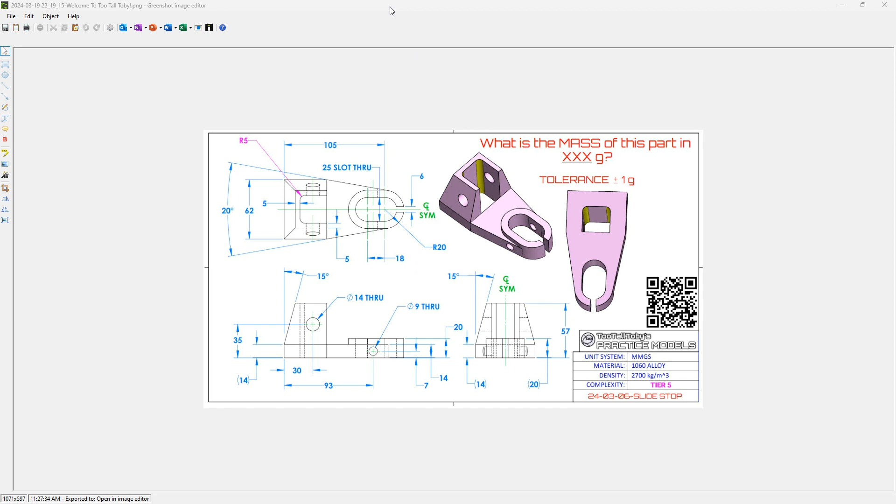So our drag and drop, some sketch creation, and show you how it's done in IronCAD a little bit differently. We'll go ahead and move this over to another screen. The first thing we're going to do is start with the slot feature in our standard starter catalog, and we'll go ahead and select that feature.

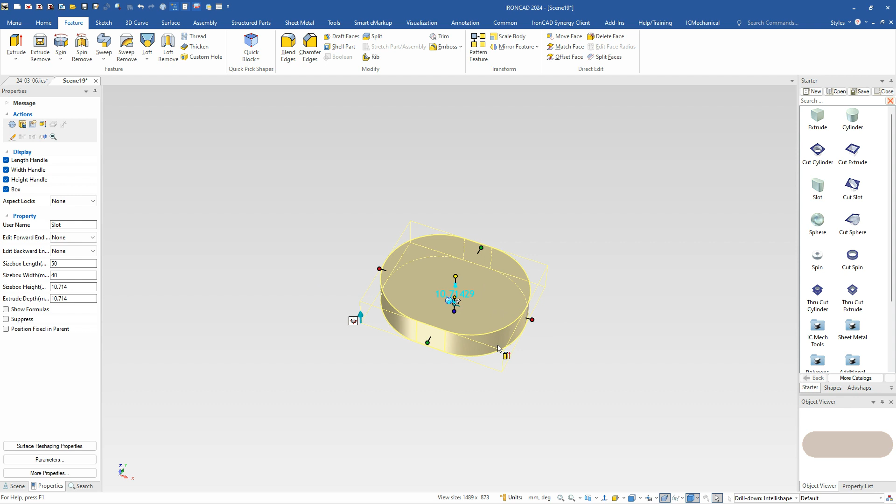We know the width is 40 for the major diameter there, and we know the center to center is 18, but our handles, if you can see on our link, are on the outside. So we'll select on these and set a value that we know it's 18 from center to center plus our width, which is the 40. So we'll put plus 40 inside there, and that will give us our base for our slot.

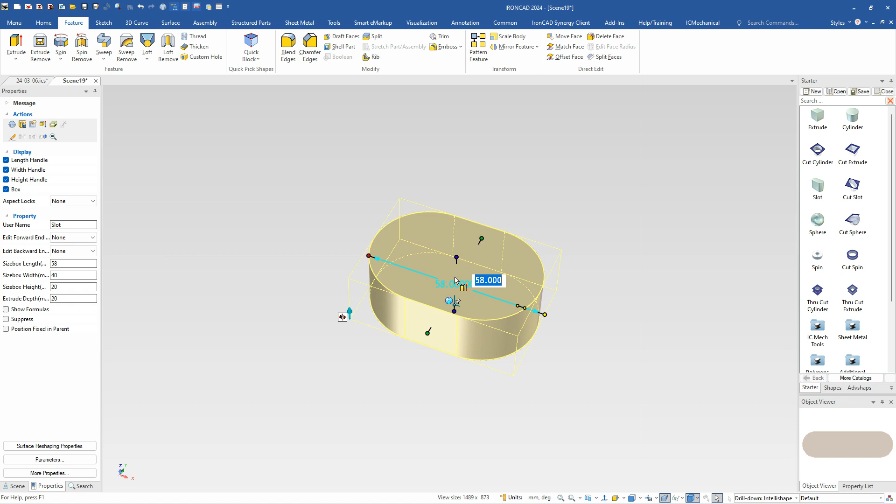We also have a height value, so we'll go ahead and set that height to 20. We'll set that as our starting point. Next, we'll go ahead and do this angle shape here.

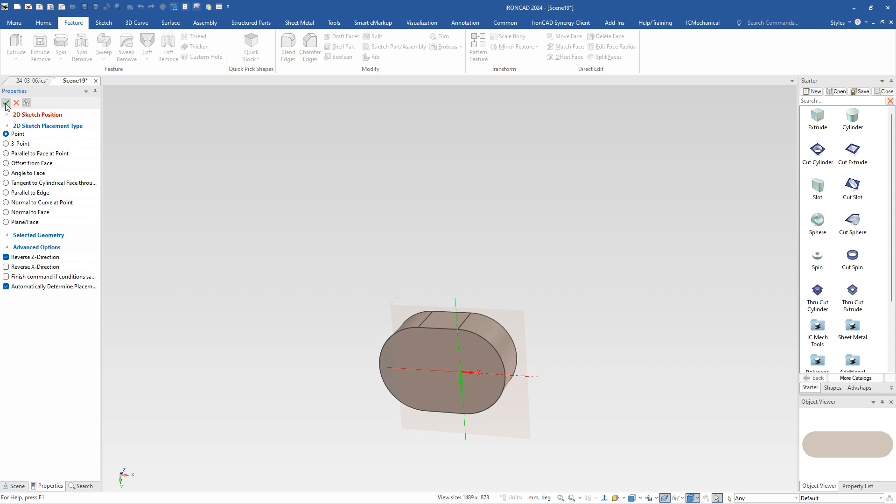What I'm going to do is rotate over here to the bottom, select our part, and go ahead and do an extrude shape off of that. What we're going to do is put a 2D profile right on the center point of our arc, because that's a reference for our 105 dimension that we need to use. This is showing our direction for our sketch with that little arrow, so that's fine. We're going to extrude that direction.

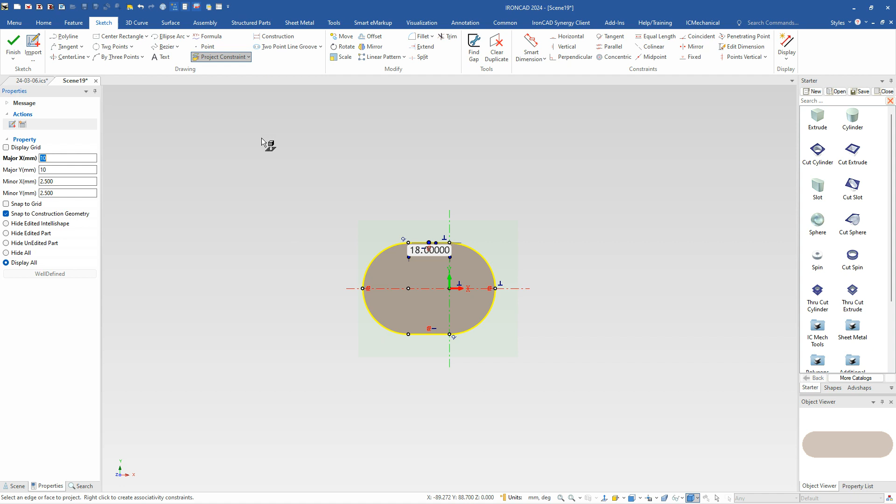I have it set to hide all. You can display it so you can see this geometry, or you can hide it - that's just the display settings you can use. But I do need to see it for a second because I do want to use this existing geometry, so I'm going to project that geometry as a construction element so I can see it's there. I can turn that off, and if I hide everything, you can see I now have those as a blue dashed line denoting construction geometry.

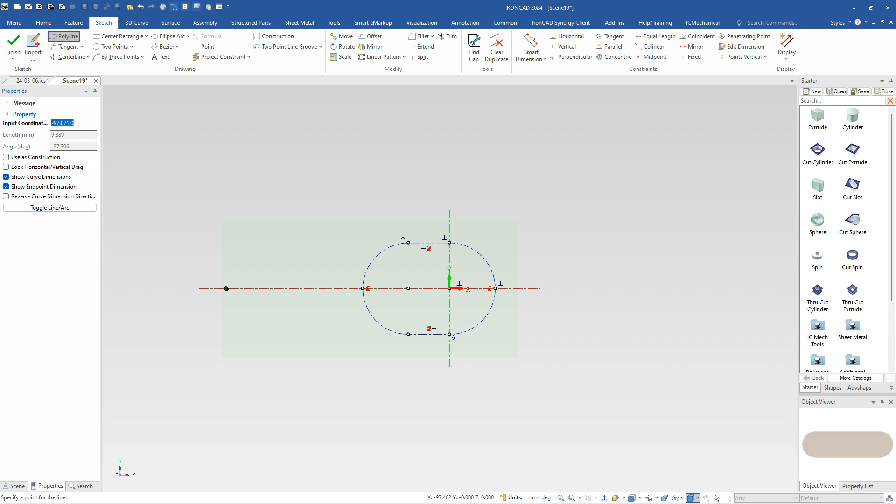Next, we want to go ahead and do a polyline, and this is going to be real geometry, using the S key. I access the polyline there, and I'm going to do a reference from my origin x-axis, go up vertical a certain value - it doesn't really matter what that is right now - and drag it over until I can see that tangency, that little blue item on our curve, then go straight down to the bottom and hit this line again.

You've seen some dimensions up there, and I'll go ahead and turn those off and explain them individually, since they come in handy here. Some things we want to do: make sure this remains vertical, and make a coincident of this point to this arc. One reason we want to do that is when you change this, this curve can move fully.

And in doing so, if you don't have that coincident, the curve can move, and then you have to extend it back or trim it later. So what we're going to do is make sure it's coincident with that, so when this line changes, we'll get that information.

The next step, you can do this in multiple ways. I'm going to show you an alternative way to build this versus traditionally using sketch dimensions, where you can put an angle sketch dimension here and a dimension from here to here and drive this curve, which you can easily do with our smart dimensions in IronCAD. But you don't always have to add dimensions in your sketches - it's not always a requirement that you'll find in other CAD systems.

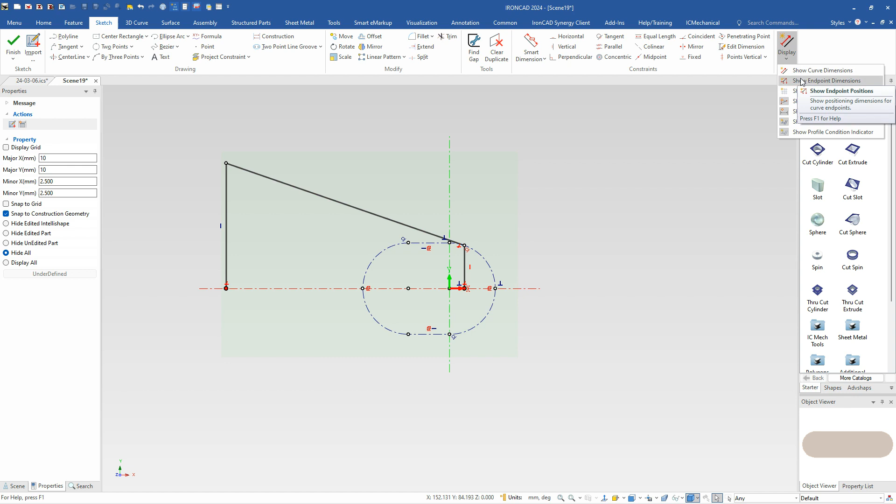So what I mean is those things I had on before were what we call curve dimensions and endpoint dimensions. Curve dimensions are exactly that - if I select on a curve, it's going to give me the length of that information and also the angle. In this case, we know this angle has to be at 10 degrees or 170 here because it's going to total 20 on each side. So we're going to change that by double clicking and typing 170.

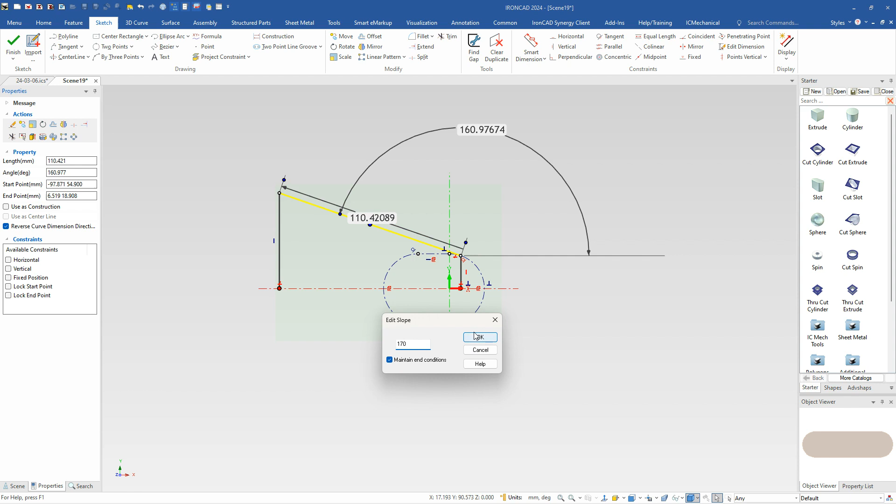Now there's an interesting option here that says maintain end conditions. What that means is it's got to maintain this tangency and this height if that's on - so it actually wouldn't allow this, because this height has to change. So we're going to turn that off and say go ahead and make that change. It's going to move that height, change our value to 170, and maintain this because we have constraints on there.

So that gives us our first part - that's what curve dimensions do. But again, the curve dimension is this length here, which is not what I know. All I know is from this center point or this y-axis to here is a certain distance, so this won't do me any good. That's what the other option is - endpoint dimensions.

Endpoint dimensions, when you select on curves, can show you the endpoints from their references on either end of the curve - in this case the x and y - but you can also move these to other references, which is really handy if you have other geometry you want to refer to.

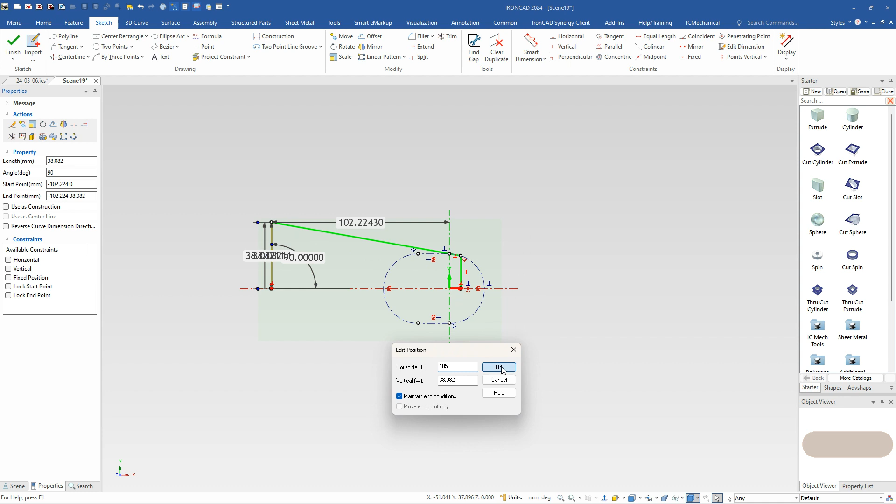In this case, we know this line is 102 right now, but we want that to be 105, so we're going to set that to 105. But here we do want to maintain the ending condition - we want to maintain this and this slope. So when we hit 105 and hit OK, we can see we've got our distance 105. We select on this, we still have our 170 inside there - without adding any constraints out here, we can do that easily within IronCAD's curve dimensions and sketch position dimensions.

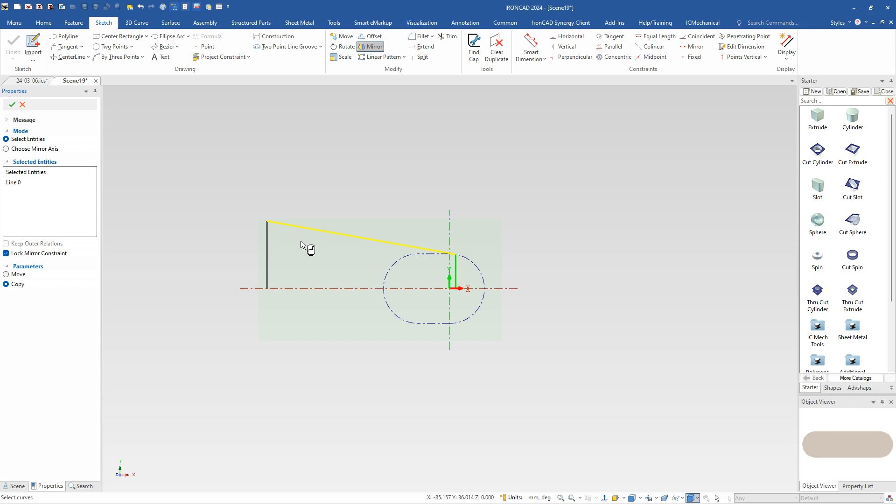Next, we'll go ahead and mirror this over to the other side. We can do this as a constraint or just a mirror command - we're going to select that curve and mirror it over to the other side and place that. Then we can extend these other two down, accessed through the S key extend or on the ribbon bar. You can see it highlighted, but also see what it's extending to - you can hit tab to extend to another curve down, and we can extend to those two lines down to connect there.

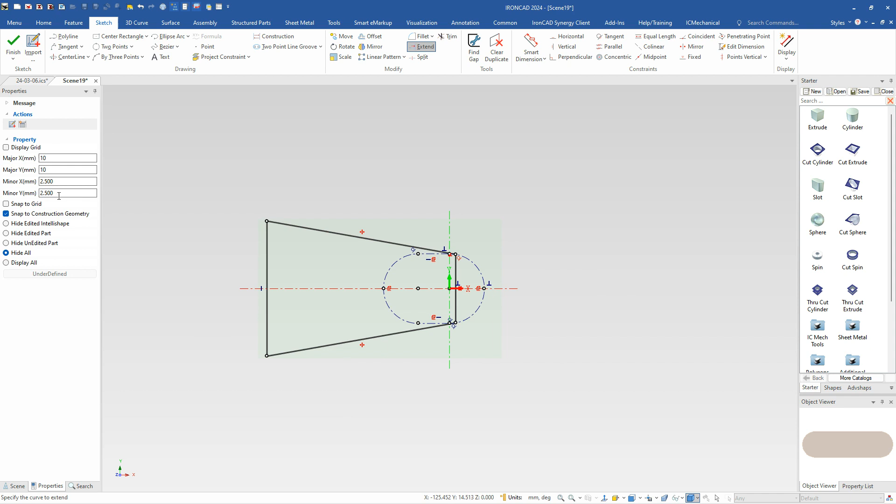So that basically builds our profile very easily in IronCAD - again, just a different way. We could have done it with sketch dimensions if we wanted to, but we didn't need to. We can also extrude our sketch, and we just set a value of 14 for the height and hit OK to go ahead and build that. So that's kind of how I built that angle here.

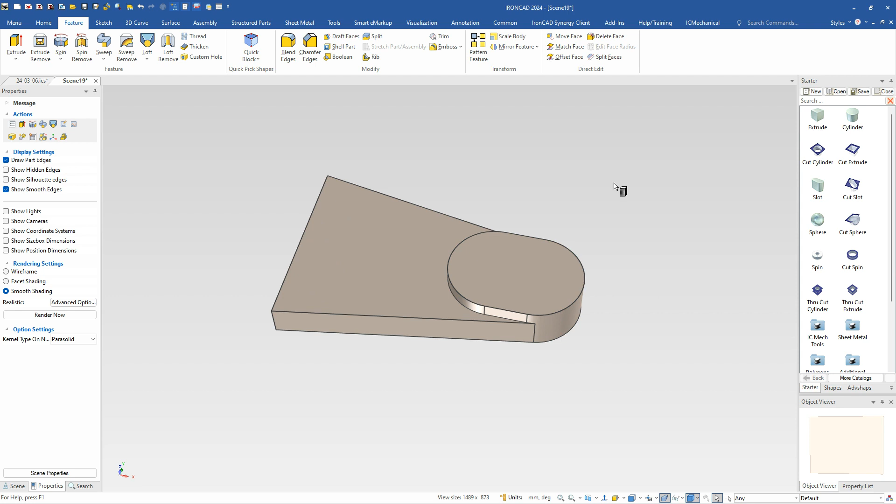And the next thing is our little extrusion here off the top. This one's interesting too because there's a couple unique things - we don't know how deep this thing needs to go. So what I'm going to do is drop my extrusion on here and align it to the back. We know our width of this thing is 62, I believe - let me double check that.

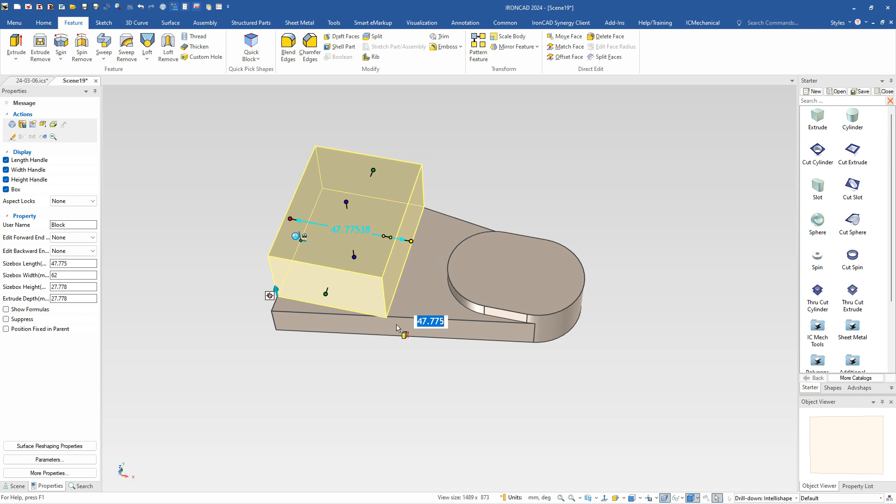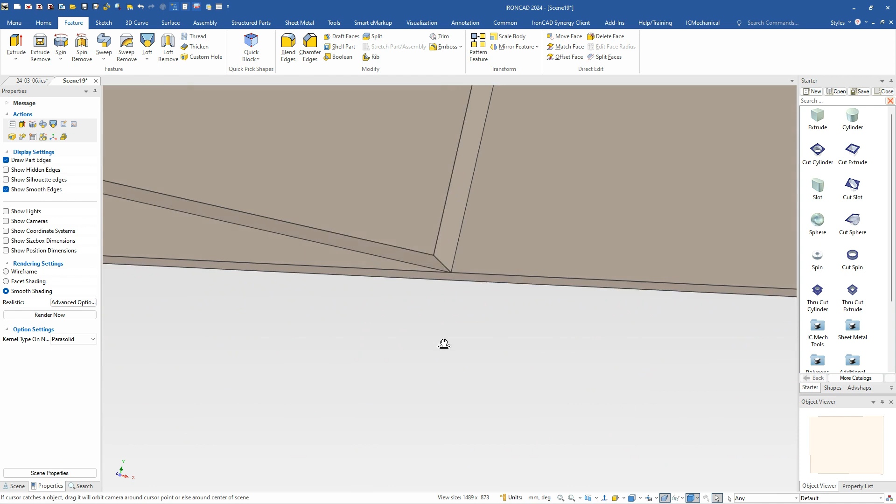62 millimeters there, so we're going to set that value and pull this one in. Notice I don't have an actual point to snap to, so I can't get the intersection point because there isn't one at this time. So even in this case, if I try to snap back here, I can actually get the actual intersection point. That's one way to approach it - just pull it past it so you get an intersection point and snap it back.

It's sort of like if you would have started in a sketch here, extruded the sketch up, and drew a line until it penetrated that curve, or coincident with that curve. Either way, this is just a way to do it with our handles - a fast way to pull it past and pull it back to get to that snap point.

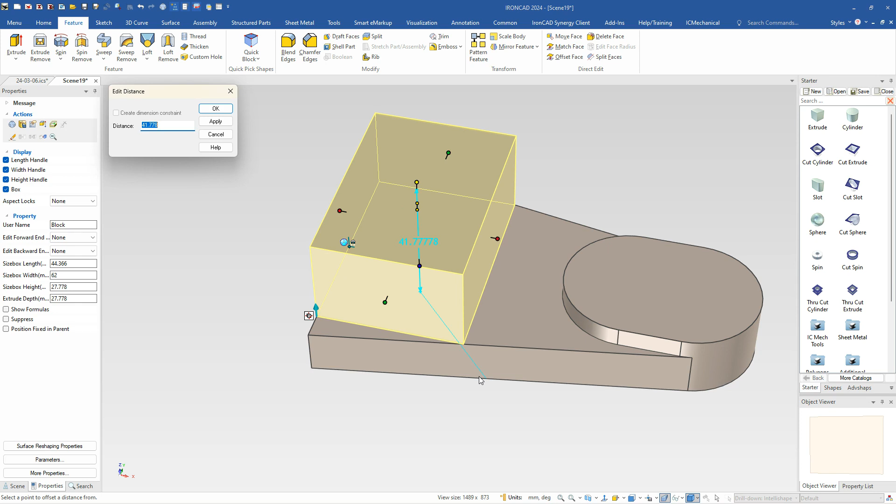The other thing we know is this has an actual height, so we're going to edit the distance from a point from this bottom edge here. We know the height of this thing is 57 from the bottom to the very top, so we can set that. That gives us our basis for this extrusion.

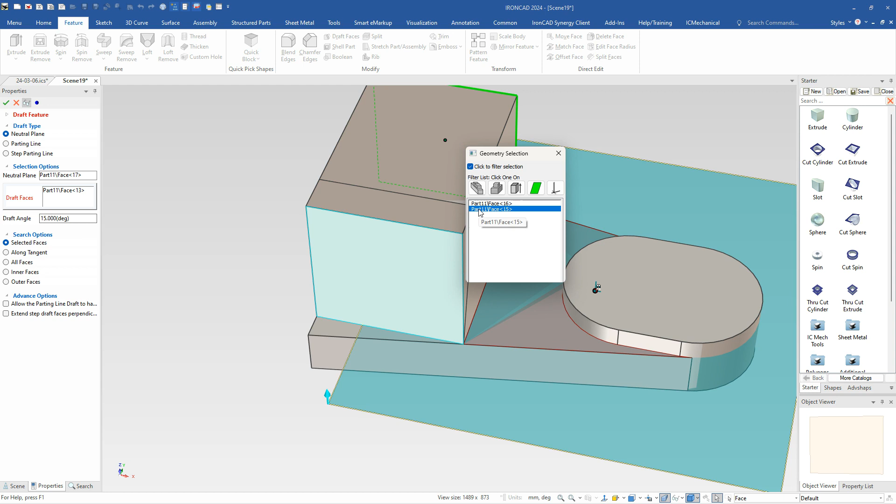Next we'll use our draft faces, which will allow us to draft this face 15 degrees, and we want to do the other side. We can rotate around or do Control Alt left click, which brings up our geometry selector. We want to get this back face as the other face to add to that list, so we select those two and hit draft on them. Now we've got our draft for those two faces.

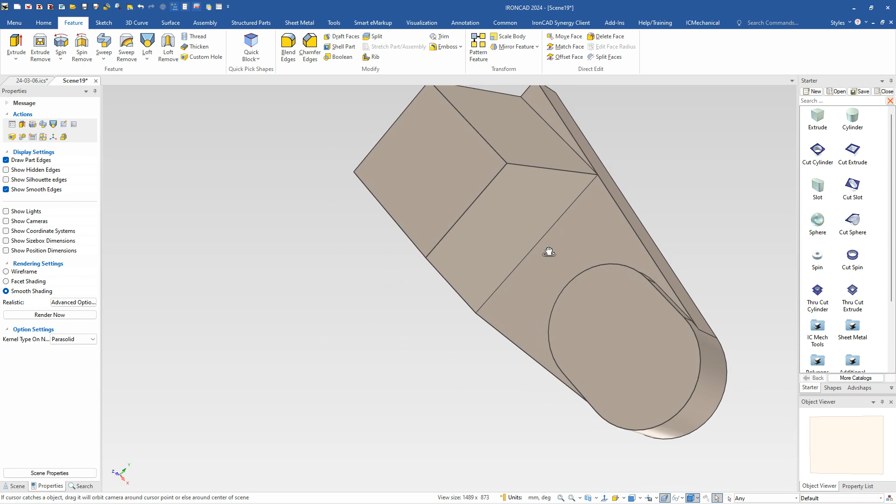Now we know we have these little overhangs here, and we don't want these. We don't have to create a sketch - we just grab that face, get a handle, and pull it down to cut that extrusion off. We can do that on both sides. Grab the other one, pull it down to the other side - I don't really care how far, I'm just extruding it down.

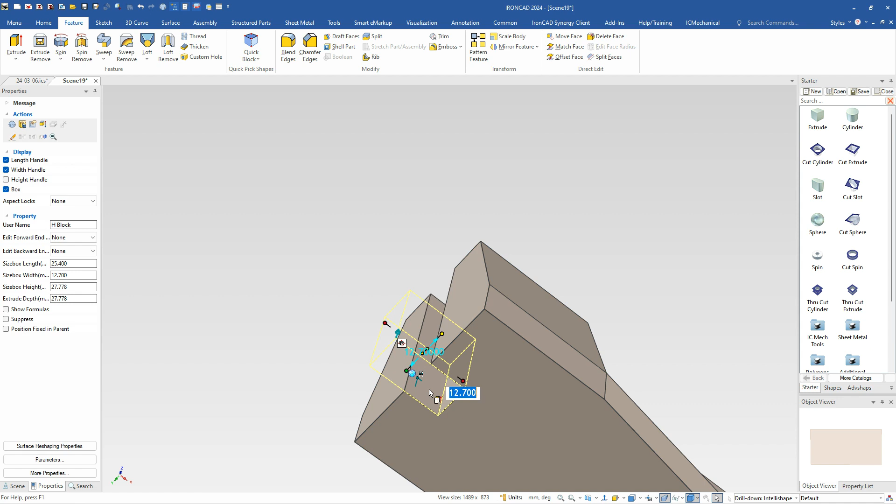That gives us our basis for the shape, and now we have to deal with this taper on the back. This one's actually fairly easy to do as well. I'm going to rotate to the bottom, and drop a through cut on this center point, simply aligning it to this back face. What I'm going to do is just rotate this thing.

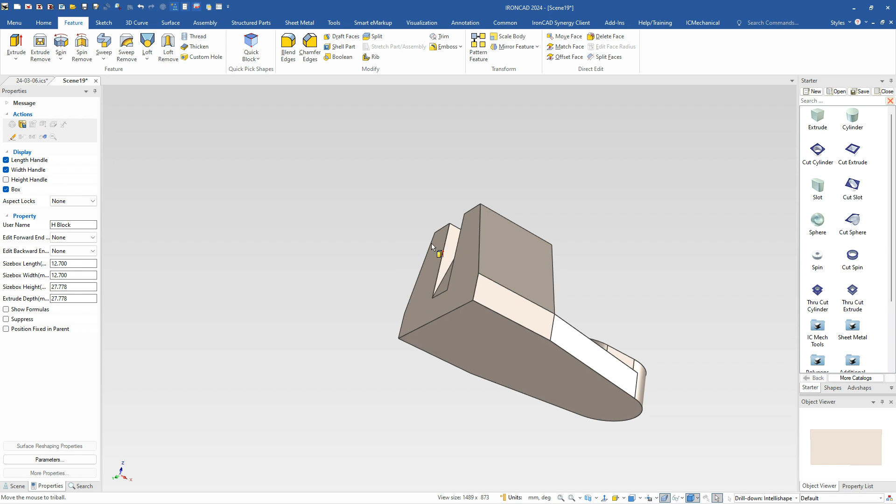How I'm going to rotate that is using the tri-ball. I'll pull the tri-ball up and snap it basically over to this location - that's where we're rotating about, essentially. Then I'm going to rotate it over 15 degrees, and that will give me my shape for us to pull our handle symmetrically to cut that extra geometry off. So that's a simple way to approach that.

We don't have to do any extra draft planes or put an edge there, like for a parting edge or anything like that. To draft, we can just use an extra shape and move it around. This is kind of just the way we work in IronCAD - we just think in 3D for this.

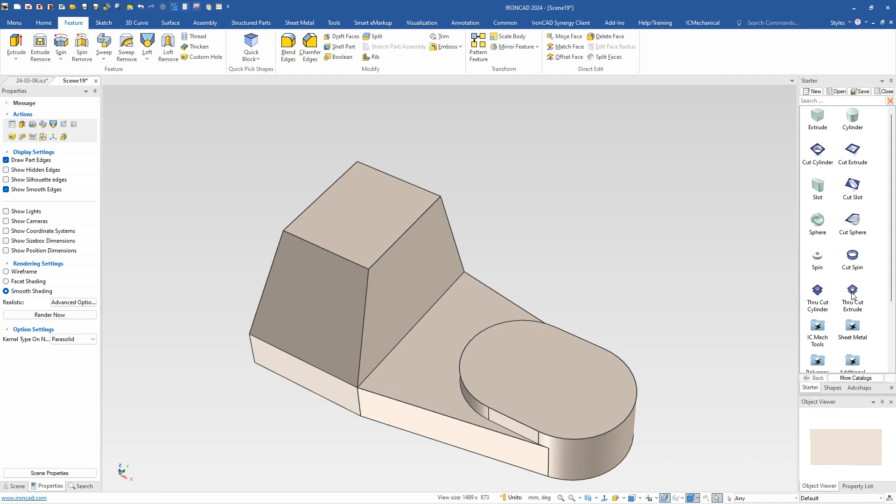Next, we're going to do all of our hole geometry inside of here. You can do a lot of this stuff with sketches in other systems, and you can do so in IronCAD as well - just trying to show some different ways to do this, thinking in 3D. We have these through cuts here that we can drag and drop out. In this case, we're going to extrude down here to cut this.

We can snap to our face to align to this edge where we have the starting of our cut. Now we just need to do our references to these edges. One thing we do again is right click to drag symmetrically, and I'm going to hold my shift key down to snap to this point, aligning to that top edge. We know it has an offset of 5 on each end, so we'll move our cursor to the end of that value and subtract that 10, since I have no idea what the total value is.

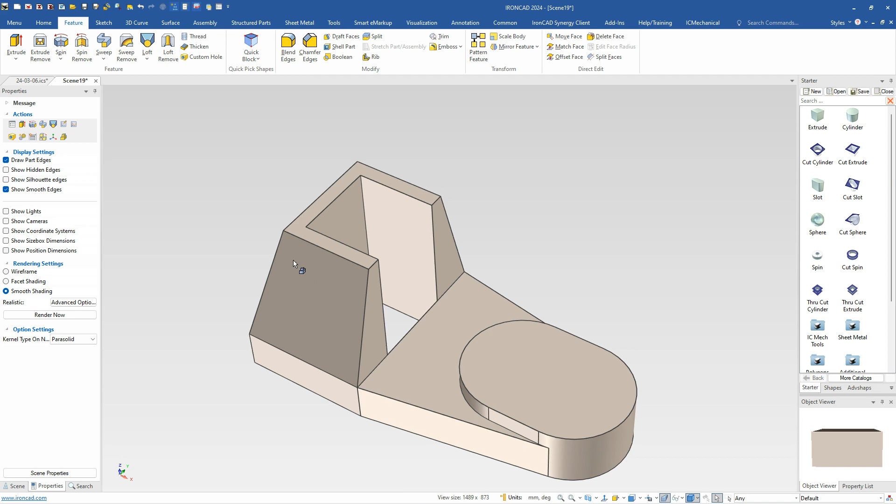I just know that needs to be 5. Same for this one, I can just pull that handle and subtract 5, or add a distance like we've shown earlier from a point. In this case, I can just align that handle, subtract 5 from that, and I've got that value. You can see your values are correct. If you select down to the point or edge, it'll show you that length, which is 5 in those cases. You can also select a face and an edge, and that'll give you the distance there. So you can see we're accurately setting this up just using our handles.

Next, we're going to put a blend on here. So we have a blend value here for a value of 5, and we have one on this edge as well. We hit enter to apply those, and that gives us that basic shape.

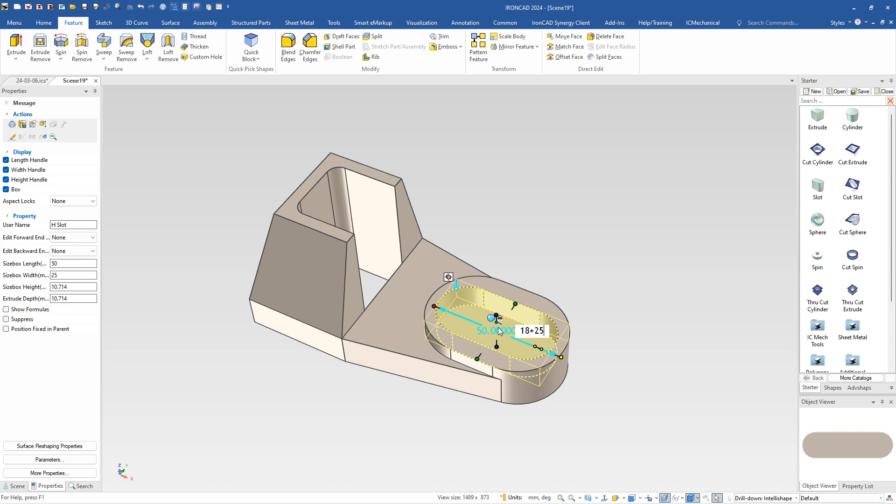Next, let's go ahead and do our cut slot, which we have a shape for already. We can drag and drop that out. This one has a width of 25 inside, and a length which is going to be just that calculation, so we hit 18 plus 25 to give us that value. Then we pull our bottom handle all the way through, or snap to the bottom face to get that cut. Then we'll use our extrude through cut again, drag and drop that out, symmetrically pull our handle and type in the value they have here for 6 millimeters to get that little cut or notch going through there. So that's a very easy way to build that.

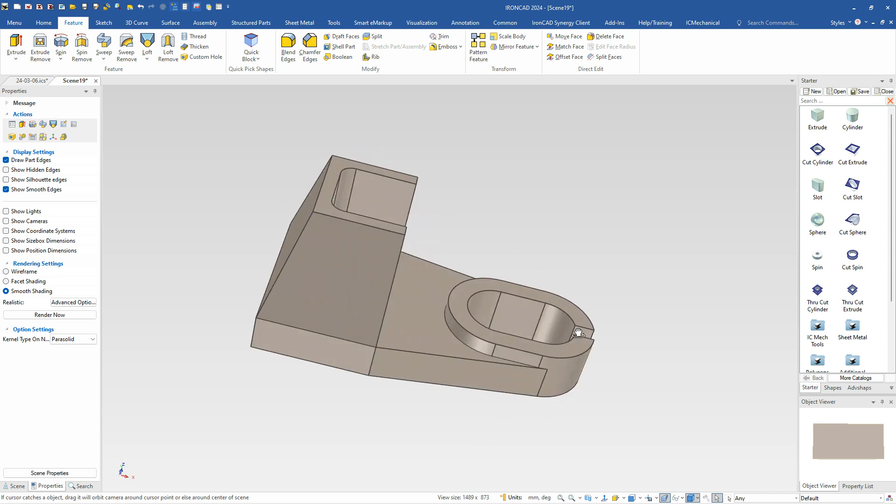Next are these two holes. This is an interesting case - most other systems would put a plane along the center line. They would draw it in the sketch to this point and do some dimensions to place that reference location, place this one in the sketch, and then extrude both of those in one shape. I'm just going to show you how to do it again using our drag and drop, another way to do this. It gives you a little bit more power if you do it outside of the sketch, because you can move these features at any point anywhere else. If you do it in the sketch, you're a little more confined on how you modify things. With these features, you're a lot easier to move things around.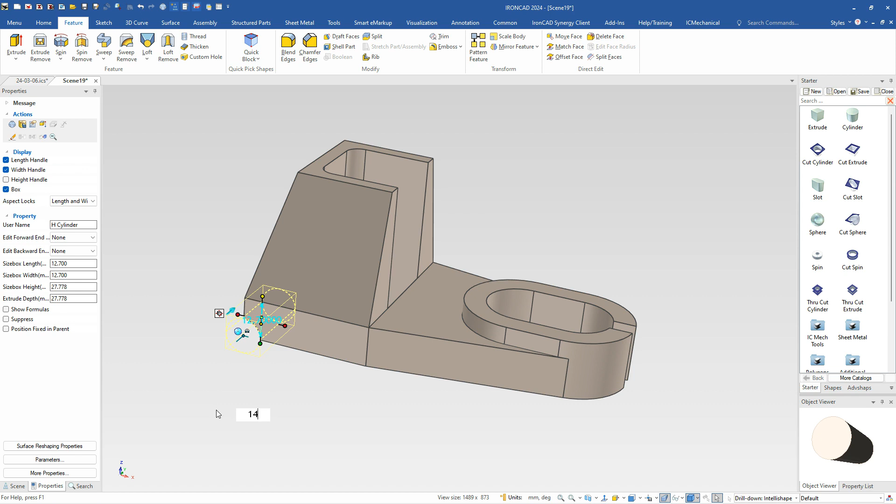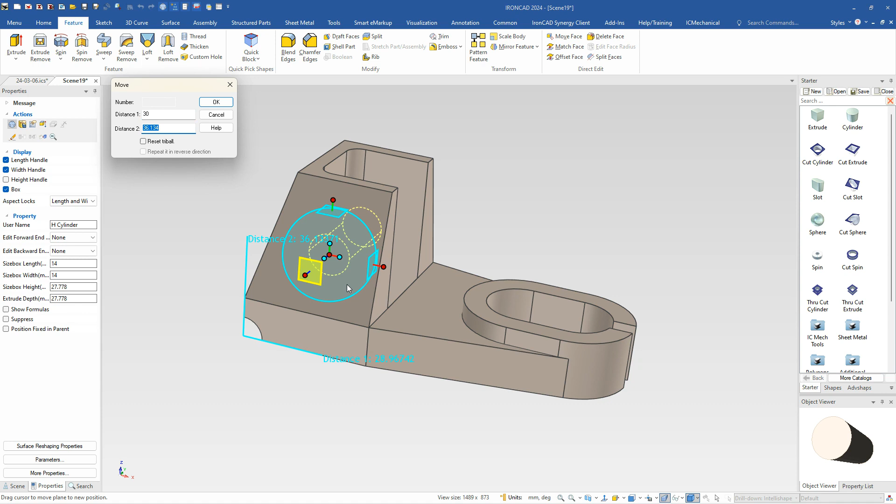For example, I can just drop a through cylinder here, and the first one on top is a 14 millimeter shape. All I'm going to do is bring up my tri-ball, and I got my reference point. I can now use this plane handle because I'm going to move in 2 directions - distance 1 and distance 2, which is up. When I right click and drag, I get an option to say move here, and I can type in those values. In this case, distance 1 is going to be 30, and it's going to go up 35. I'm just tabbing between those values, typing that, and I accurately place my hole.

Next, I want to do another hole down here, so I can just turn my tri-ball off and do the same thing, or I could have copied it back down here and done it again. Anyway, I have my hole here, and it has a value of 9. Now I just do the same thing - tri-ball, same plane handle. It's basically just moving it in the plane direction of the tri-ball where it's sitting. Again we'll just do the move here. In this case, we want to be 93 in the long value, and it's only 7 millimeters up to place that hole.

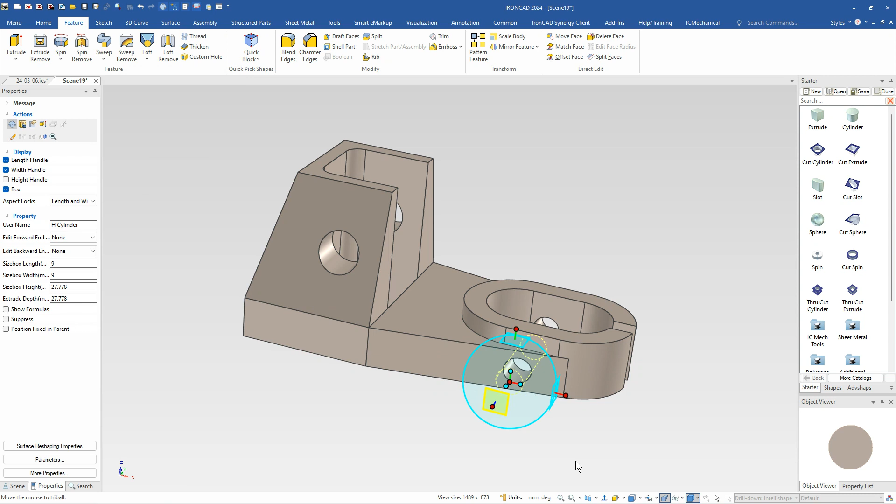So that's essentially a very easy way to place that in IronCAD. Again, these are individual features, so I can move these around and adjust their sizes easily. I don't have to go back into a sketch or use sketch dimensions to edit those. That's just an easy way to modify your geometry.

So now if we go into our property browser, they have a density for this of 2700, and that will give us a total mass of 318 for this model. So a very easy way to build this model in IronCAD. Again, multiple ways to build this - it's up to you, any user, to build it the way they want. This is showing you some new ways to do it in IronCAD.